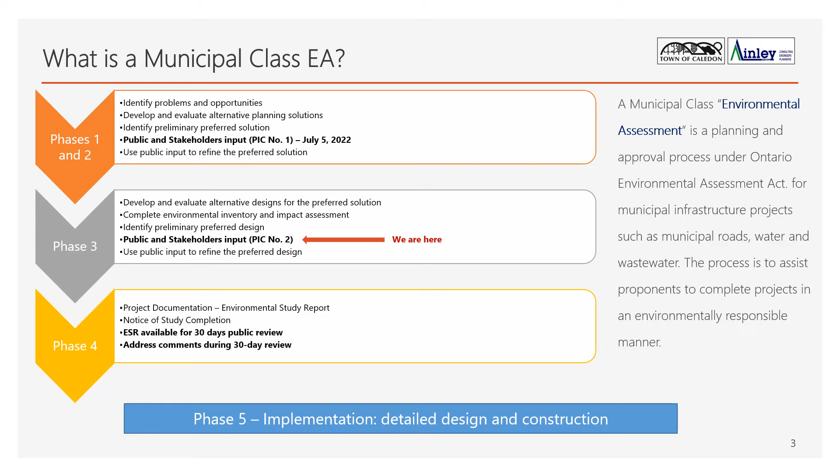Project timeline: a brief overview and timeline are shown for the work that has been completed so far as part of this Class EA. During Phase 1, a notice of commencement was published in a local newspaper as well as on the town's website that informed readers of the town's initiation of a Municipal Class EA.

Also during Phase 1, a problem opportunity statement was developed that is relevant for guiding the Class EA process. Then during Phase 2 of the project, the team conducted background studies, developed alternative solutions, and initiated consultation with agencies, stakeholders, and Indigenous nations.

The PIC No. 1 was hosted on July 5, 2022 during Phase 2, where inputs from the public and agencies were incorporated to finalize the preferred alternative solution.

We are currently in Phase 3 of the study, where various design options were evaluated and a preliminary preferred option is selected. The primary purpose of this PIC No. 2 is to share the details about various design options, their comparison, and the details of the preliminary preferred design for Chinguacousy Road.

However, the presentation will also cover briefly the details of the work completed before Phase 3, as presented in PIC No. 1, for the benefit of those who couldn't attend. Based on the input received from you, we will finalize a preferred design and then proceed to Phase 4 to complete the study and file it.

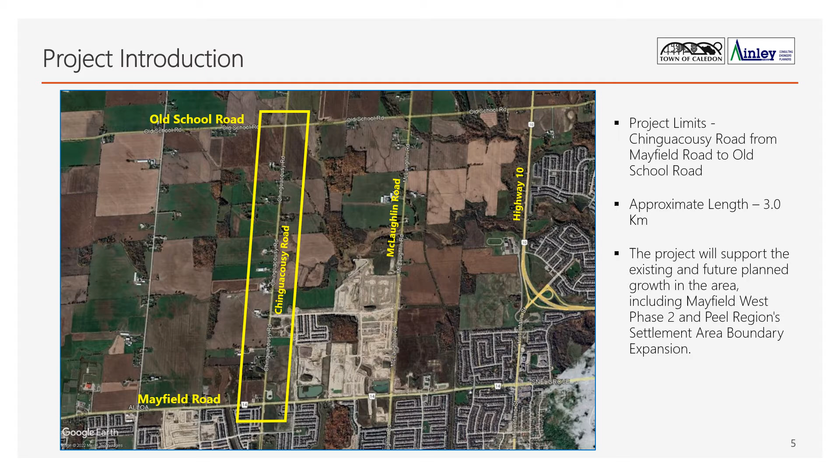Mayfield West Phase 2 is a new community being developed that will have residential and employment designated lands, as well as parks, schools, public open spaces, and recreational facilities.

A new arterial road, Tim Manley Avenue, shown by the purple solid and broken line, is being constructed as part of the development, and it will connect Chinguacousy Road with McLaughlin Road and Highway 10-410. The broken line segment is yet to be constructed.

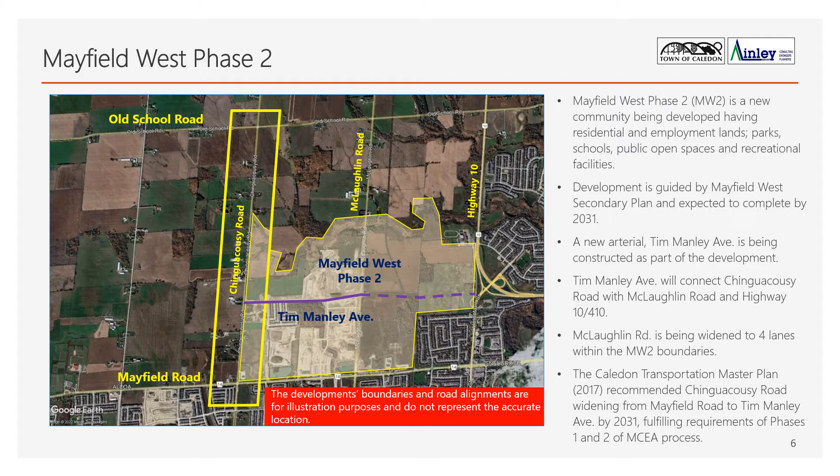The Caledon Transportation Master Plan recommended Chinguacousy Road widening from Mayfield Road to Tim Manley Avenue by 2031.

Settlement Area Boundary Expansion: The Region of Peel official plan identifies the settlement area boundary expansion, or SABE for short, in the town of Caledon to accommodate future employment and community growth. Our study corridor, highlighted by the blue rectangle, will be servicing the SABE community areas.

The transportation assessment for the SABE recommended the widening of Chinguacousy Road to 4 lanes by the year 2041. The town's official plan and transportation master plan, currently being updated, include upgrading the classification of Chinguacousy Road from a rural collector road to an urban arterial road with a 36-meter wide right-of-way.

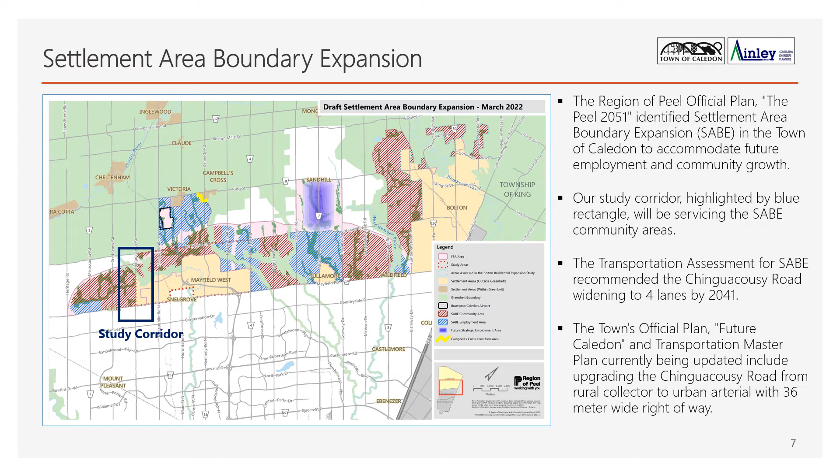Ongoing and planned network improvements. There are ongoing and planned improvements led by the Region of Peel, the City of Brampton, and the Town of Caledon adjacent to the study corridor. The design details of these projects are being considered during the EA process following an integrated planning approach.

The Region of Peel is widening Mayfield Road east of Chinguacousy Road to 6 lanes and to the west of Chinguacousy Road to 5 lanes. Multi-use paths will be constructed on both sides of Mayfield Road.

The City of Brampton is reconstructing Chinguacousy Road south of Mayfield Road from 2 to 4 lanes with multi-use paths on both sides of Chinguacousy Road. McLaughlin Road is being widened to 4 lanes within the Mayfield West Phase 2 boundary.

The Provincial Transportation Plan for the Greater Golden Horseshoe proposes the construction of the new Highway 413. An interchange is planned at Chinguacousy Road south of Old School Road. The alignment of the highway is conceptual, with the approximate location shown only for the context of our project.

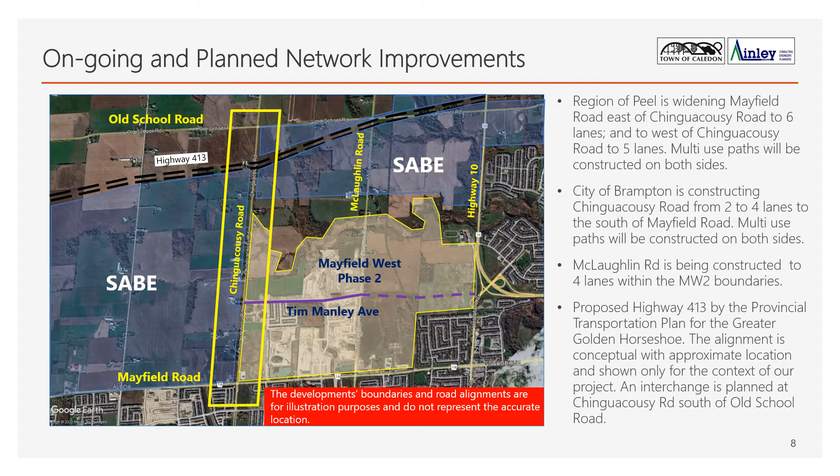The next few slides discuss the work completed up to PIC 1 and provide the background to the process of how we have reached the design options that we will be presenting today.

Problem and opportunities. At the start of the Class EA process, a problem and opportunity statement is established. This statement helps focus the development of the alternative solutions. The problems and opportunities identified for this project are the following.

Problem number 1: the current corridor lacks capacity to support future traffic demands and development. Opportunity: improve capacity to keep up with anticipated traffic demands, support future local growth, and complement other growth in the vicinity of the project limits.

Problem number 2: no transit-oriented infrastructure. Opportunity: create efficient travel routes for a transit-oriented system.

Problem number 3: does not provide multimodal transportation, which limits connectivity for area residents. Opportunity: multimodal transportation options, including pedestrian and cycling infrastructure, will support active transportation and the creation of complete communities.

Problem number 4: how do we address climate change and improve quality of life? Provide green infrastructure, implement best practices for stormwater management, enhance landscape along the proposed corridor, and include more trees.

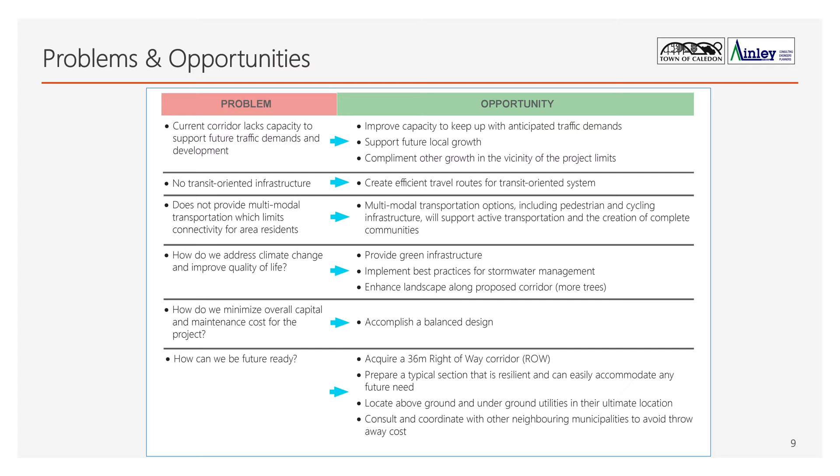Fluvial geomorphic crossing assessment, completed. Geotechnical investigation, completed. Air quality assessment, completed. Stormwater management review memo, work in progress.

If you would like to know more about these studies, you can watch the recording of the PIC 1 presentation, which is available on the project webpage.

Existing conditions, roads. Shown here are photos taken along the study corridor to provide context on the current conditions of this segment of Chinguacousy Road. As you may be able to notice, the shoulders of the road are not paved, there are no sidewalks or paths for active transportation, and no stops for transit. You may also notice that the pavement condition is fair to poor.

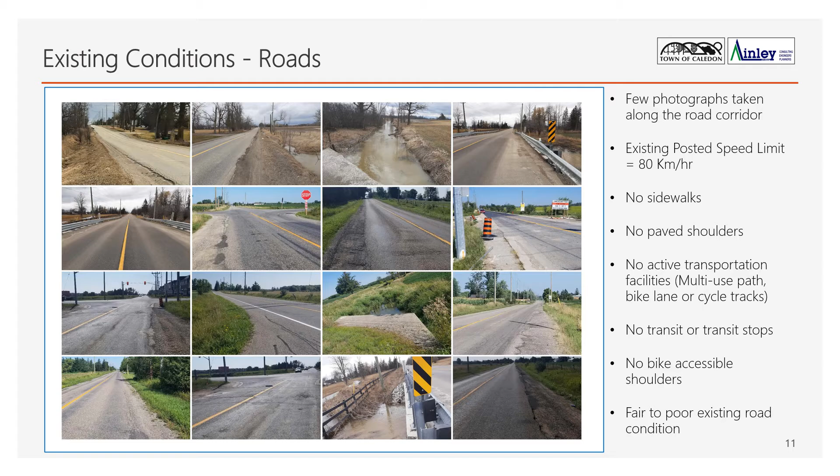Road rehabilitation is required on Chinguacousy Road north of Mayfield Road to address the pavement deficiency.

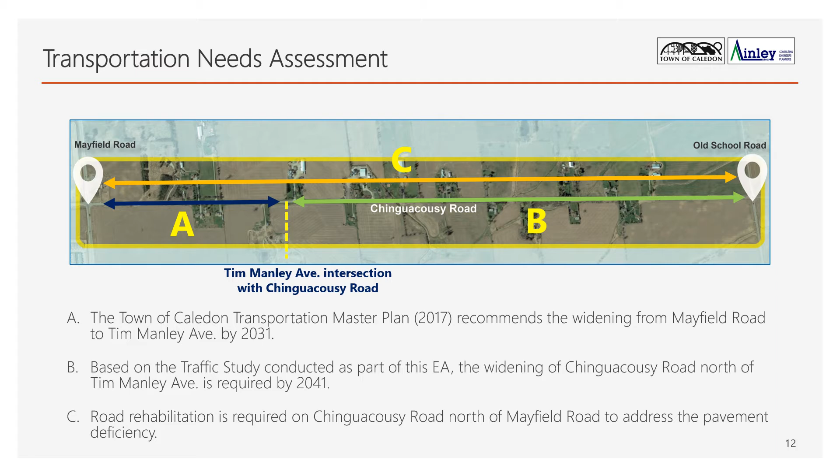Alternative planning solutions. A key component to the Class EA process is the development of alternative solutions. The alternatives propose high-level planning solutions for consideration to address the problems and opportunities earlier identified. For this Class EA, the project team developed 6 different alternative solutions.

Alternative 1, do nothing. The do nothing alternative considers no improvements and/or modifications. This alternative does not address the problem and opportunity statement and is provided as a benchmark to gauge the potential impacts of the other options being considered.

Alternative 2, limit development. Limit development of surrounding lands to only what has been approved or is in the approval process. This limitation would deny any future development of adjacent land along Chinguacousy Road.

Alternative 3, improve alternative routes. Undertake improvements, including capacity addition, to other corridors in proximity of Chinguacousy Road to provide desirable alternative routes.

Alternative 4, local roadway intersection improvements. Modify existing roadway and intersections locally to improve operations.

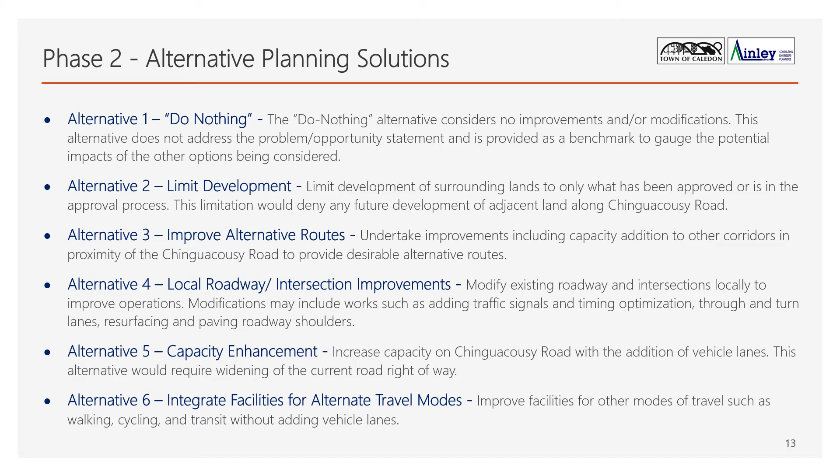Alternative 6, integrate facilities for alternate travel modes: improve facilities for other modes of travel, such as walking, cycling, and transit, without adding vehicle lanes.

Preferred solution. The evaluation of the alternative solutions was completed using a set of criteria to ensure relevant potential impacts were identified. A total of 5 main criteria were selected to evaluate each alternative solution.

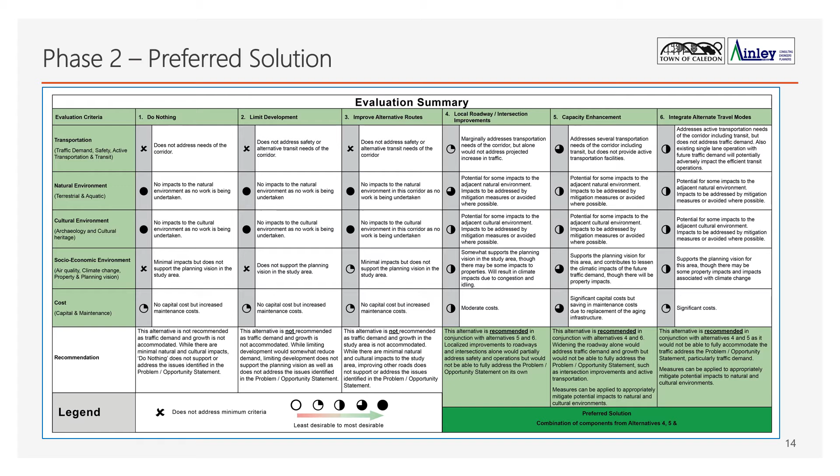For the purpose of this presentation, we won't walk through each cell. However, the PIC-1 materials and the evaluation matrix in PDF are available on the project website for those who want to read through. The key finding of the evaluation is that a combination of alternatives 4, 5, and 6 was found to be the preferred option. The preferred option was selected after we heard back from the public and agencies upon conclusion of the PIC No. 1 meeting during Phase 2.

The preferred solution includes the following: intersection improvements such as adding turn lanes, signalization, and pedestrian and bike crossing facilities; capacity enhancement, which can be done by widening the road; and integrating alternative travel modes, such as transit and multi-use paths for cycling and walking.

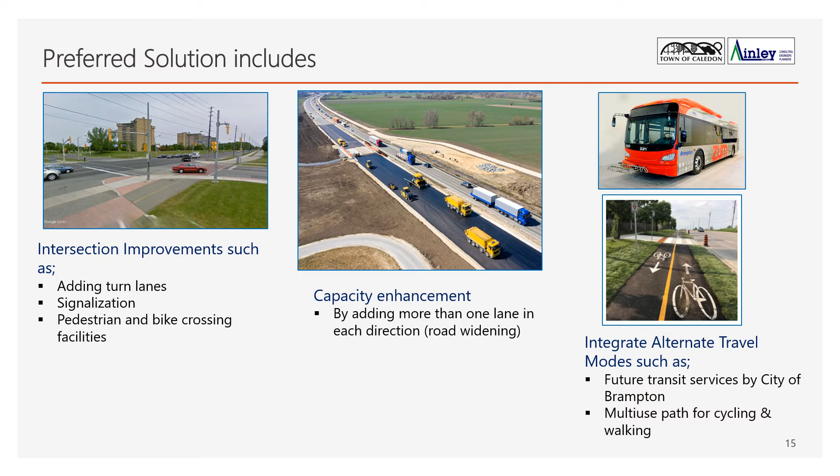What we have heard so far: we have received the following comments from public, agencies, and stakeholders. We have reviewed each comment and included these comments in our evaluation work during Phase 2 and 3.

Public: consider use of roundabout. Based on site constraints, future traffic, and need for additional right-of-way, the roundabout was found not feasible at Chinguacousy Road and Tim Manley Avenue intersection.

For Chinguacousy Road and Old School Road intersection, the Town of Caledon will monitor the traffic over the next few years and will review the roundabout feasibility when that respective Chinguacousy Road segment will be urbanized. To protect student safety, access to new schools will be provided from side roads and not Chinguacousy Road.

Compensation for homeowner for property impact and coordination: the town will follow up with the landowners during the detailed design phase to discuss property acquisition and compensation requirements.

Restoration of existing features along the private property, for example trees, fences, landscaping, mailboxes, etc. The town will follow up with the existing landowners to discuss the restoration requirements during the detailed design phase.

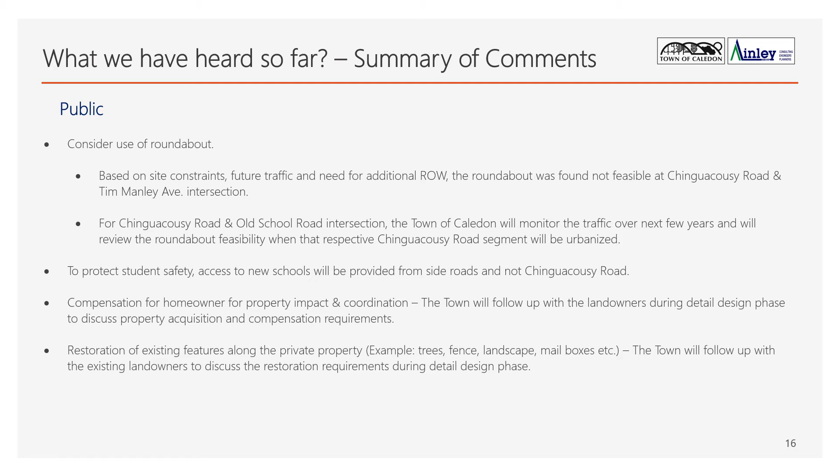Region of Peel: evaluation of the planning alternatives should better reflect the AT facilities, value for vulnerable road users, and climate change. The preferred alternative includes a multi-use path on both sides.

Identify stormwater impacts to the regional road infrastructure, if any. The Town of Caledon will coordinate the stormwater infrastructure with the Region of Peel during the detailed design phase.

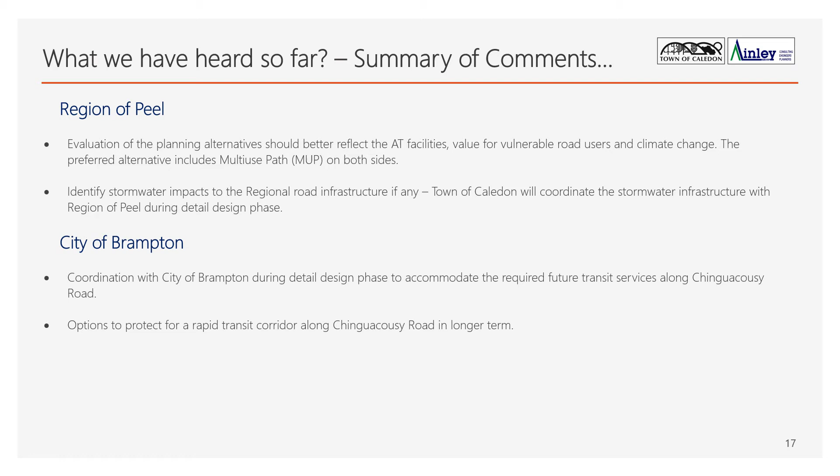City of Brampton: coordination with the City of Brampton during the detailed design phase to accommodate the required future transit services along Chinguacousy Road, and options to protect for a rapid transit corridor along Chinguacousy Road in the longer term.

MECP, TRCA, and CVC: use of the MECP Areas of Interest document. This guidance document is used throughout the EA process to ensure that all areas are reviewed and considered as part of the EA work. The stormwater control and ESC requirements will be provided during the 30% and 60% design submissions.

Utility companies: coordination with utility companies for utility relocation work. The town has acknowledged this comment and will coordinate with various utility companies during the detailed design phase for any utility relocation work.

Indigenous communities: interest to collaborate in all stages of archaeological investigation work. The Stage 1 archaeological investigation report was shared with Indigenous communities and no further comments were received.

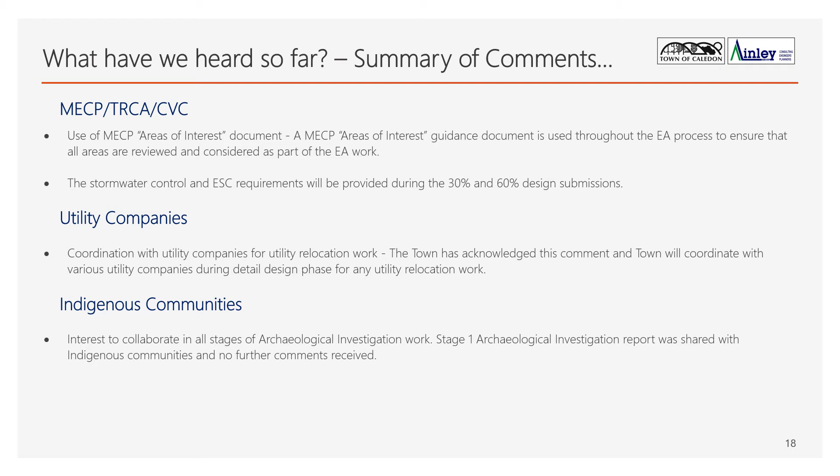Preliminary design considerations. Now we will present the details of the process we followed to develop the various design options for implementing the preferred solution.

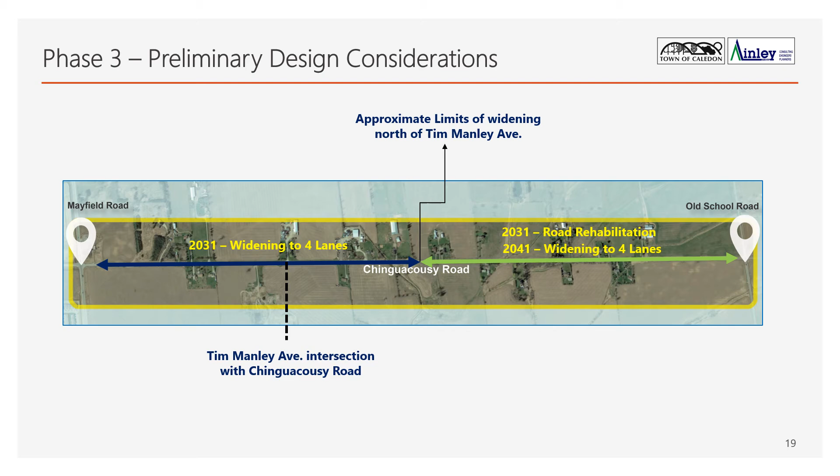Climate change: as part of the EA study, we have reviewed and considered the following items, which we will recommend to be explored in greater detail during the design phase. This is to address or mitigate factors resulting from climate change.

First, work with adjacent developments to achieve a common goal. Second, use of the latest TRCA and CVC guidelines in stormwater management review. Third, use of the latest TRCA and CVC hydraulic and hydrology models in stormwater management review. Fourth, use of the latest MECP guidelines to implement green initiatives where possible. Fifth, the study will include commitments in future to achieve design resilience. Sixth, the study will include future commitments to aim for and achieve a balanced design approach.

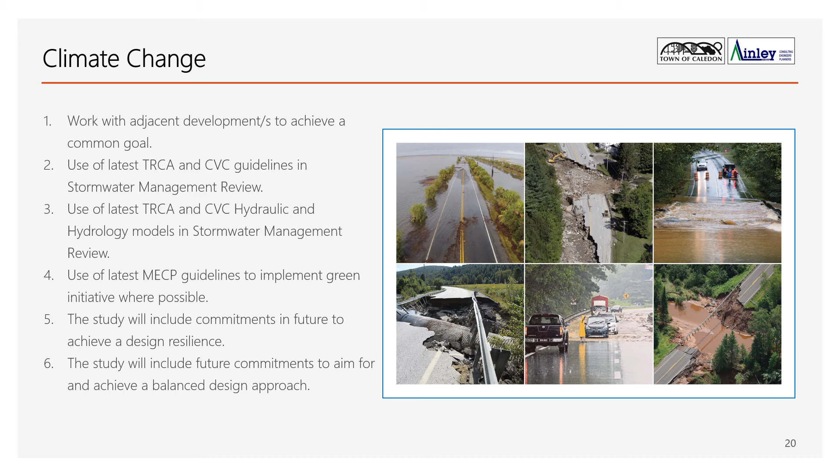Use of best stormwater management practices. As part of EA's study, we have reviewed and considered the following items which we will recommend to be explored in greater detail during the design phase. The goal is to provide measures to infiltrate and evaporate collected stormwater as much as possible, in addition to a conventional storm sewer system, to meet quality, quantity, and water retention requirements. These include bioswale, bioretention, underground stormwater chambers, catch basin litter control, stormwater ponds, soil cell system, and super pipes.

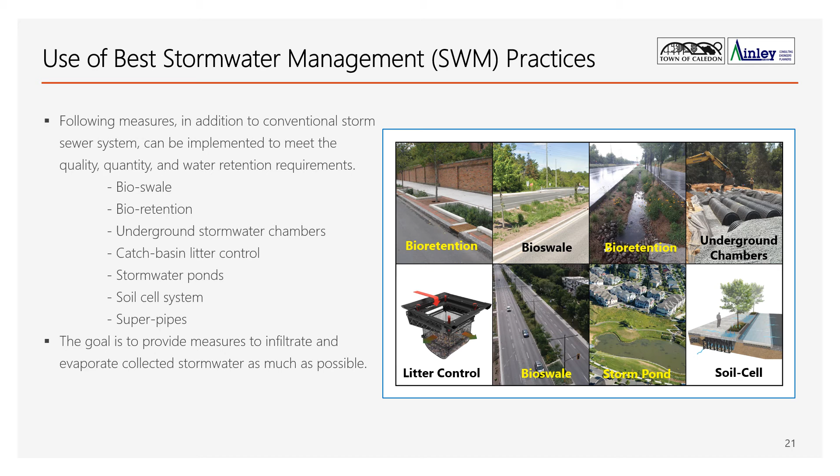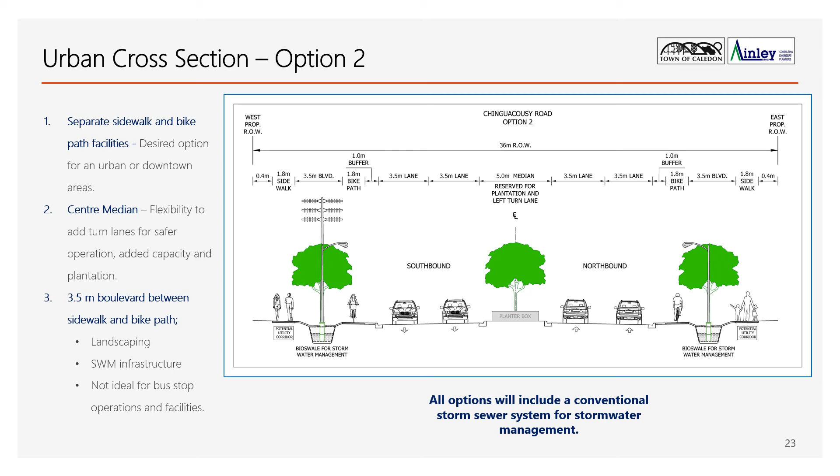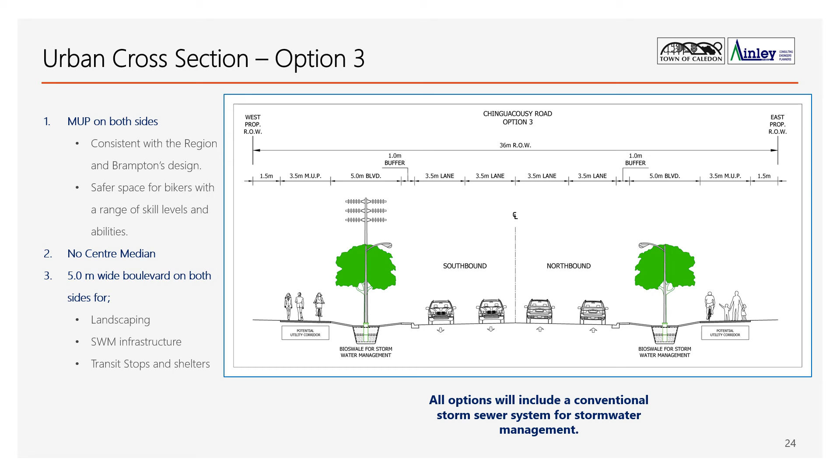Urban cross-section, option 3. Option 3 is similar to option 1, but without a center median. The option lacks access management flexibility because the vehicle waiting to turn left will impede the flow of through traffic, thus compromising the safety and affecting the capacity. Option 3 includes a wider boulevard on both sides of the corridor for landscaping. The 5-meter boulevard provides more room for stormwater management, transit stops, and shelters.

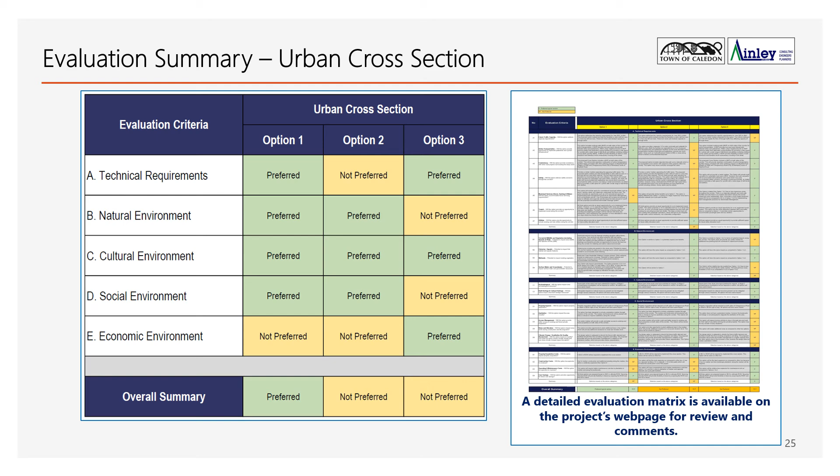Evaluation summary. All 3 options were evaluated using 5 main evaluation criteria: technical requirements, natural environment, cultural environment, social environment, and economic environment. Based on the evaluation results, it was determined that option 1 is the preliminary preferred design option because of its ability to better integrate with the Mayfield Road and Chinguacousy Road design south of Mayfield Road, better and safer access management due to the center median, a multi-use path providing a safer space for bikers with a range of skills and abilities, and finally, transit stop operations free of interference from bikers on multi-use paths. A detailed evaluation matrix is available on the project's webpage for review and comments.

Rehabilitation cross-section, option A. As discussed earlier, widening up to the north of Tim Manley will be required by 2031, and beyond that to Old School Road by 2041. Therefore, the segment beyond north of Tim Manley will need to be rehabilitated until the ultimate widening.

Two design options were evaluated for the rehabilitation segment. Option A is consistent with the existing corridor design and does not provide any improvements along the corridor for active transportation. Drainage is maintained through the existing ditches. Since this segment is not warranted for improvements until 2041, road resurfacing including some drainage improvements will be considered.

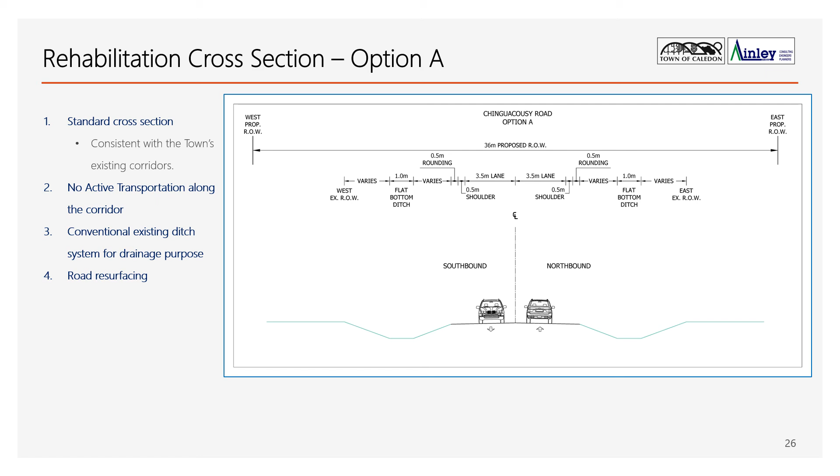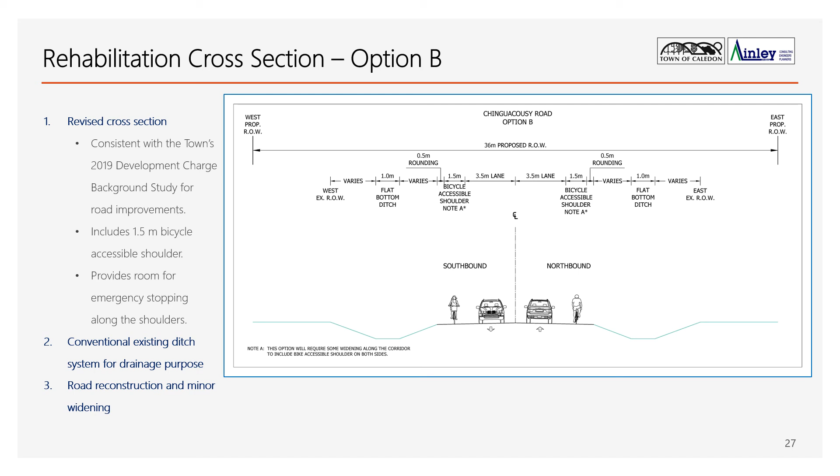The drainage will be conveyed through an improved ditch system. The road will be reconstructed to include the required widening and to correct any road cross-fall issue along the corridor.

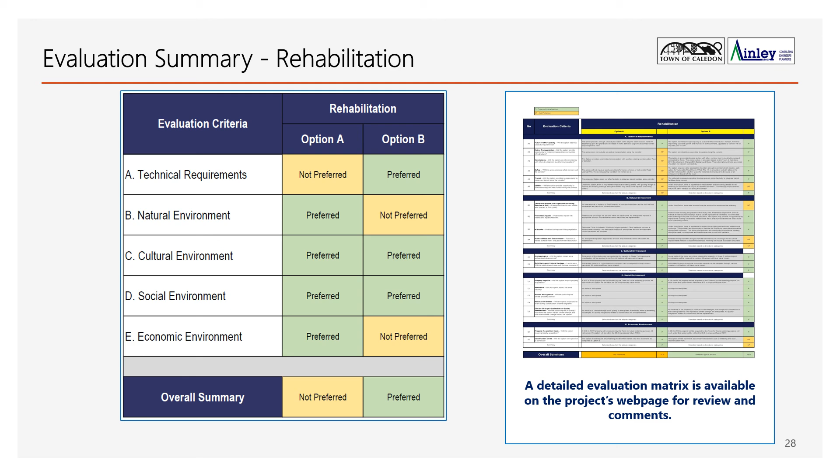Evaluation summary, rehabilitation. The two options for the rehabilitation cross-section were evaluated using the same five main evaluation criteria used for the urban cross-section. Based on the evaluation results, it was determined that option B scored more points, which is reflected in the detailed evaluation matrix, and accordingly was selected as the preferred preliminary option for the rehabilitation segment. A detailed evaluation matrix is available on the project's webpage for review and comments.

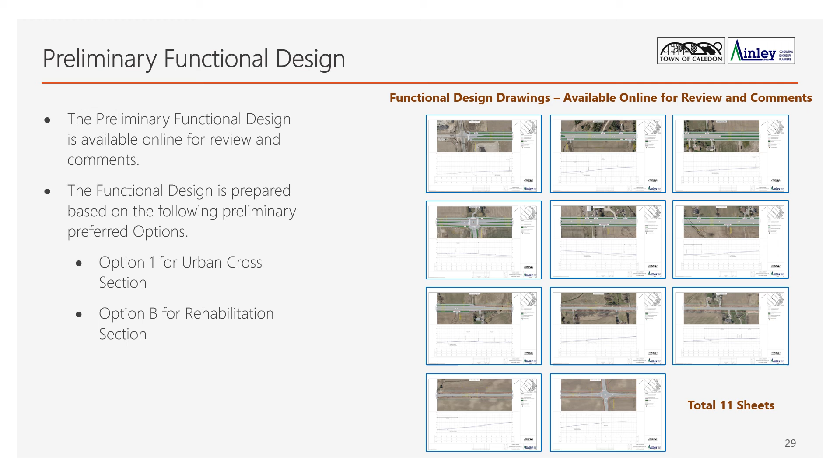How to read the preliminary functional design drawings. There are a total of 11 drawing sheets, arranged from the southern end of the project limits to the northern end, from Mayfield Road to Old School Road. A legend is included on the right-hand side of all sheets, indicating the color and line type used for various design elements.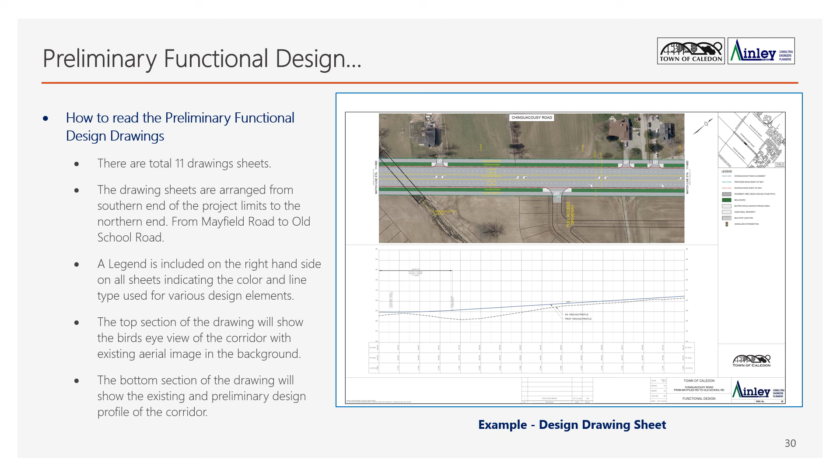The top section of the drawing will show the bird's eye view of the corridor with the existing aerial image in the background. The bottom section of the drawing will show the existing and preliminary design profile of the corridor.

Commitments during detailed design. The following commitments will be reviewed in great detail and implemented during the design phase: Town of Caledon to coordinate with landowners during detailed design, mitigate impacts to existing built heritage features, restore existing features if impacted by road widening works, and work with adjacent developers to avoid throwaway cost.

Continue to engage Indigenous communities. Work with neighboring municipalities to provide a consistent corridor and implement new services such as transit along the corridor. Provide new utility services to existing landowners along the corridor when available, and complete Stage 2 archaeological assessment.

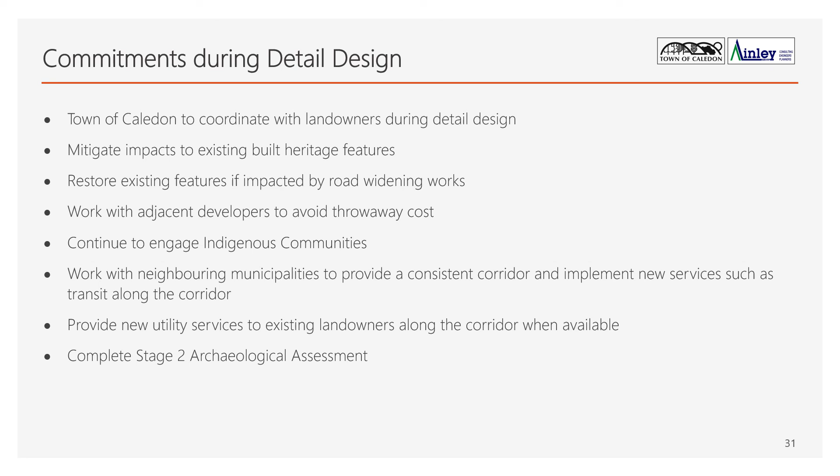Next steps. The project team would like to hear from you. As part of the Public Information Center for Phase 3, please share your comments or questions on the project information presented. There is a designated comment period, so please be sure to provide your input before November 30th, 2022.

An online comment form can be found on the town's website. After the comment period, the project team will review all of the input received and a preferred design solution will be confirmed. The project will then enter Phase 4 of the Class EA process.

Phase 4 of the Schedule C Class EA process is the publishing of an Environmental Study Report. This report will summarize the entire Class EA process and will be open to 30 days review by the public for comments. This concludes the presentation for Public Information Center number 2 for the Chinguacousy Road Improvements Class EA.